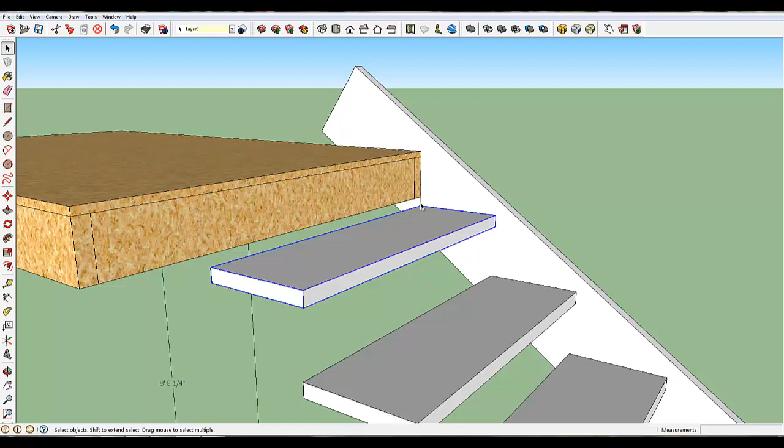All right, let's finish this up. First thing you'll notice is I have that little line right here that I used originally to lay out my 7.5 inches. So I'm going to erase that because that's going to get in the way.

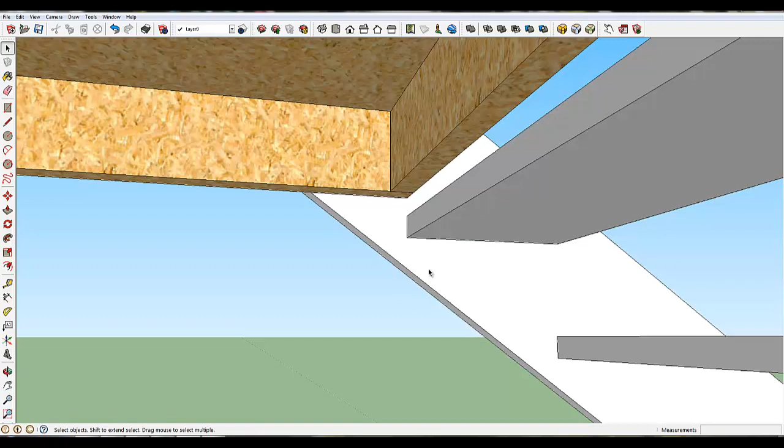The next thing we're going to do is trim around this stringer so that it fits on the top platform here. Let's go down underneath so I can see this area. Let's double click on my stringer because it's a group and I have to double click to edit it. I'm going to use a line now, draw it to this corner, then rotate a little so we can see this side, and go from here straight up, making sure that stays pink.

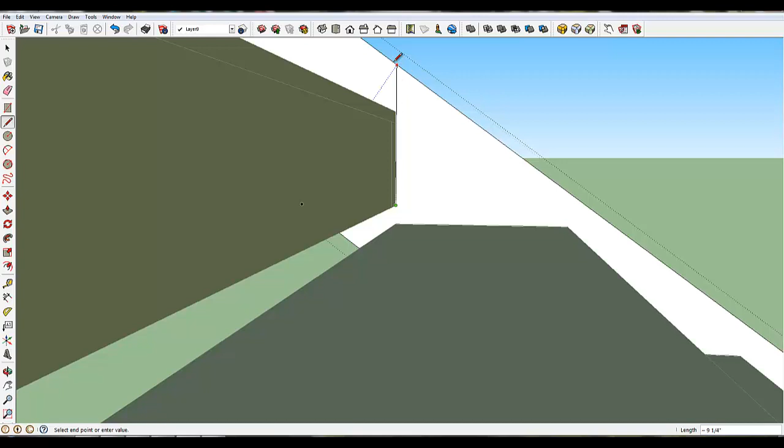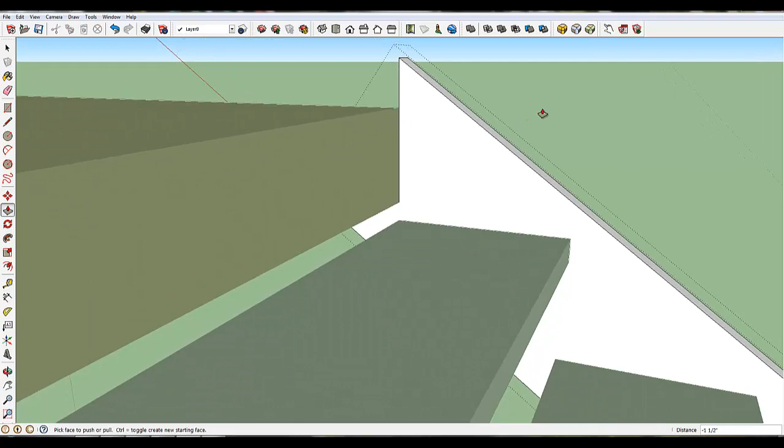Let's try this again. There we go. Make sure it stays pink, and then click there. Now all I have to do is push this part out, and when I do that, it's going to create this. You can see now how it fits nicely around that platform, and that's going to work out really well to lock in up here.

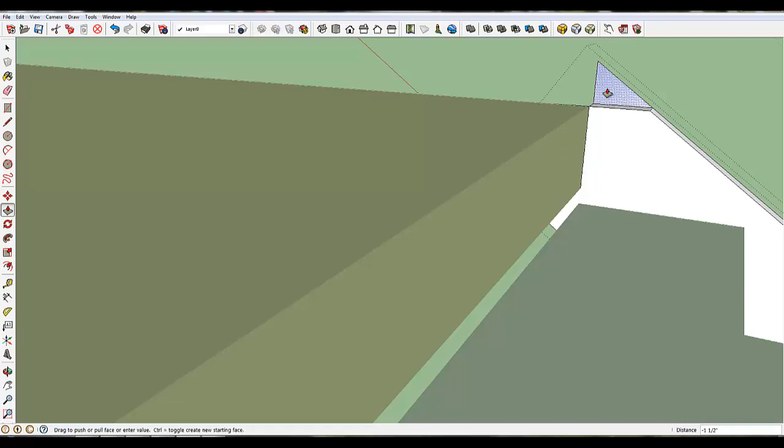There's one more cut I have to make on this 2x12, so let's do that right now. I need to knock this corner off up here. So let's take a line again, and I'm going to start over here just a little bit so it comes out nice and straight. You'll see it shows pink again, which means it's parallel to that top edge. So I'm going to click here, and now all I have to do is push that out. You can see I've got a nice clean corner now that's going to fit perfectly on that platform.

Now the next thing I need to do is move this stringer that's now made and make a copy of it to put on the other side. This is going to be a little tricky, but it's an easy move. So here we go.

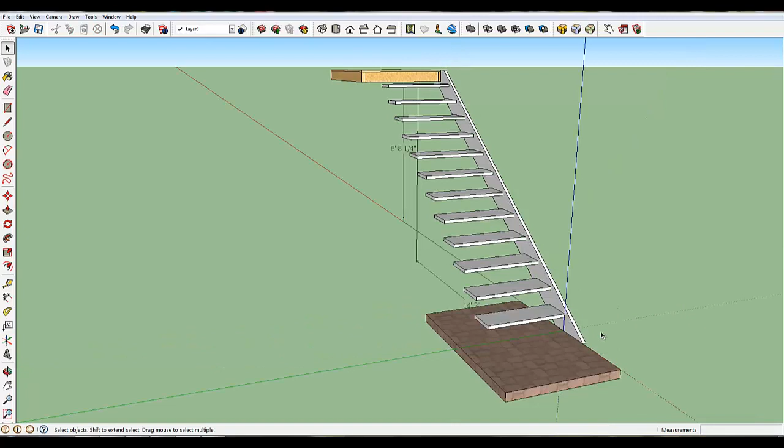First I want to select it, and I'll move it from one of these two points, it doesn't matter which. If you remember, the steps are 36 inches long. If I move it 36 inches, the problem is it's not going to move all the way over, it'll end up inside of this step. So 36 inches will only get this edge over to about here. I need to go over 36 plus the thickness of that board, which is 1.5 inches.

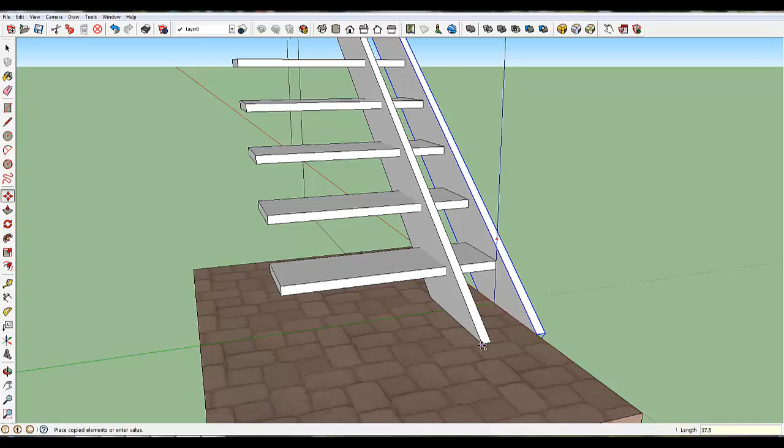So when I move this, let's get it up where you can see it a little better. I'm going to use my move tool and grab a corner here, doesn't matter which one of the two, and start moving it over. Now I need to make a copy, so I'll hit Control. There's my copy, and this needs to go over 36 plus 1.5 inches, which is 37.5. You'll see I've typed that in the lower right. When I hit Enter, I now have that stringer exactly lined up on the inside edge of that stairway.

All right, the last thing you'll notice is the stairway is not lined up or centered on the platforms at the top and the bottom. So let's fix that part.

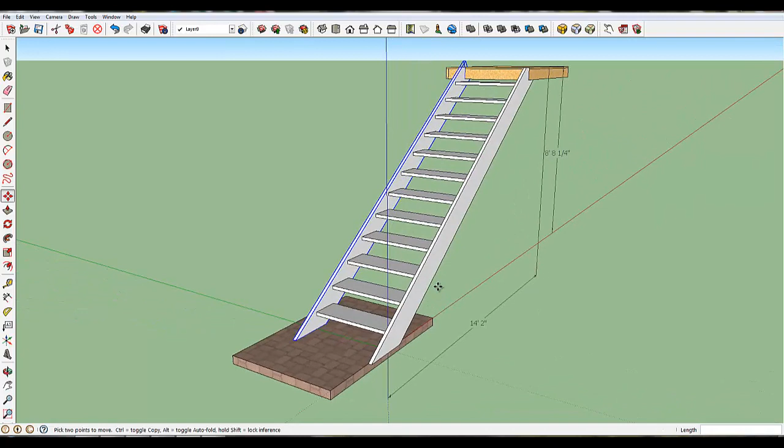First I want to select everything, and there are a lot of different ways you can do that. I'm just going to use this tool. Everything it touches gets selected, but you'll notice it missed a few of the steps, so let's do those individually. I'm holding the Control key down, and you'll see the little plus sign show up, which means I can add things to my selection. So I'll select these last couple items that I didn't get.

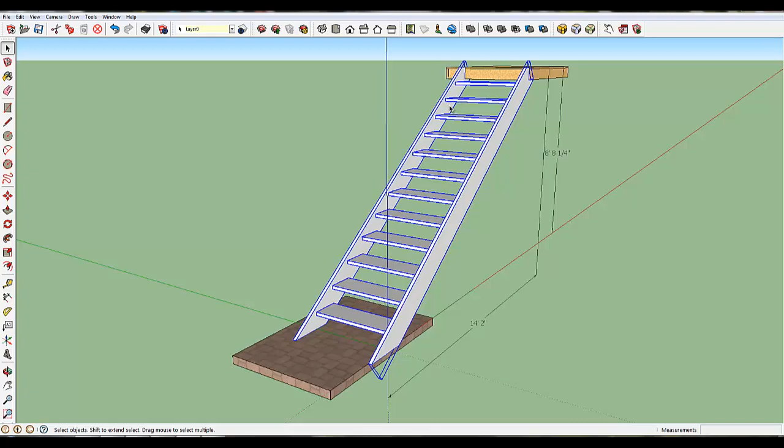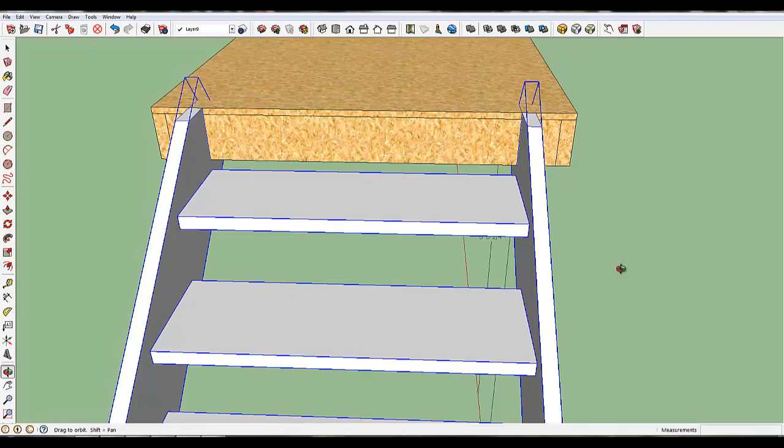The easy way to move this is up here at the top because it's really close to this platform, so let's zoom in on that and rotate a little so you can see this happen. I'm going to use the move tool and grab the midpoint of this component, and we're going to move it this way, but I need to line it up on the center of the platform. So I'll come up here to the platform, find its midpoint, and then come straight down, making sure you're on the Z-axis. You'll see the blue line there, and there it is. Now I'm dead center on the platform, and my stairway is finished.

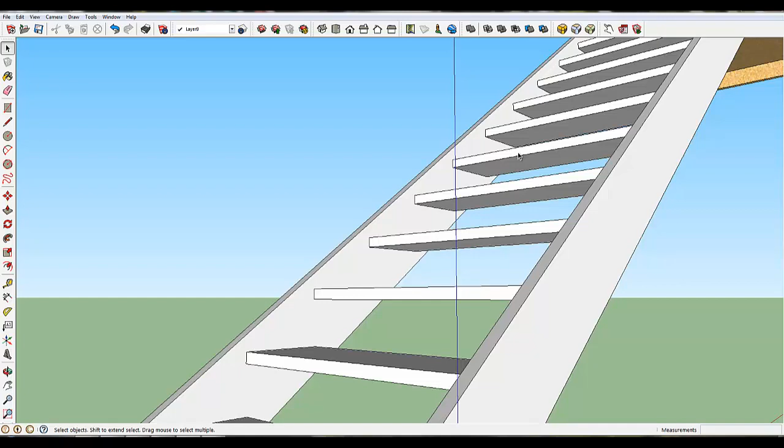The last thing you've got to do on this is, if you want to put some color on the wood, you can do that, but you also have a little bracket that you have to put under each step to hold the stair in place. I'm not going to do a video for that, but it's basically the same as what you did with the stairs: you'll create the bracket, make it a component, and using an array, create that bracket all the way up under every step, and it's going to be the one that holds the stairs in place. I'll have a picture of that up on the whiteboard, so use that for dimensions. That's it.